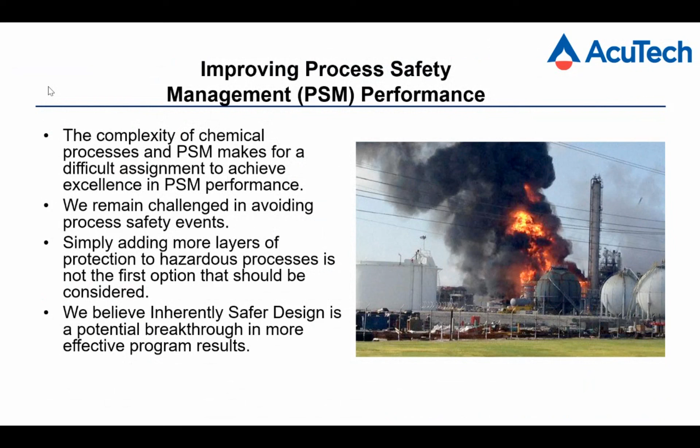I think that inherent safety is a 50-year-old breakthrough that is just waiting to happen. I hope that this discussion inspires you to look into inherently safer design more thoroughly and to see the potential that it has to help all of us.

ISD is something that you probably have experienced or know something about. It's a topic that's been around since the 60s, originally developed and coined by ICI in the UK in the late 60s. Trevor Kletz, one of the most prolific writers there was in the process safety field, was highly known for this topic. He had a famous saying, 'What you don't have can't leak.'

That philosophy was something that he discovered from years of watching all there is to do about process safety. He basically concluded that one of the most important items is inherent safety. And it's very pragmatic.

In essence, let's take it from the top. Examples of inherent safety would include finding a way to substitute a chemical that's more benign for one that is highly toxic or flammable when you're in the development stage of a new process, in order to affect a dramatic change in the hazards of the expected operation.

Or maybe the transportation of chemicals. You find a way to limit chemicals you transport, or to limit quantities, or to avoid transportation altogether through hazardous populated areas. Or maybe it's involving the process facilities themselves in the manufacturing. There are techniques that you might use to reduce the reactivity, reduce the hazards being present, or even in commissioning.

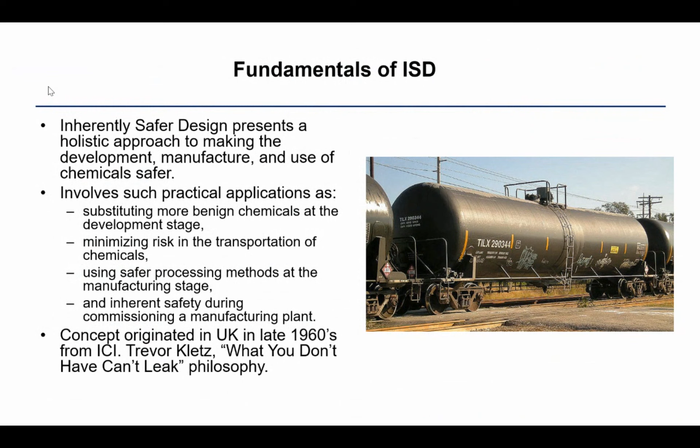In a nutshell, there's plenty of examples throughout history of the industry of us making smart decisions that you could call inherent safety. What I'm talking about is organizing that into a concentrated effort and getting the maximum value out of it. Now, a lot of what we're going to talk about comes from the fact that we just completed the 3rd edition for CCPS.

This is now published and available from CCPS, and it's an improvement over the 2nd edition, which we also wrote. This is the source of much of the content in this webinar, which you're welcome to look at, or to contact me if you had questions going forward.

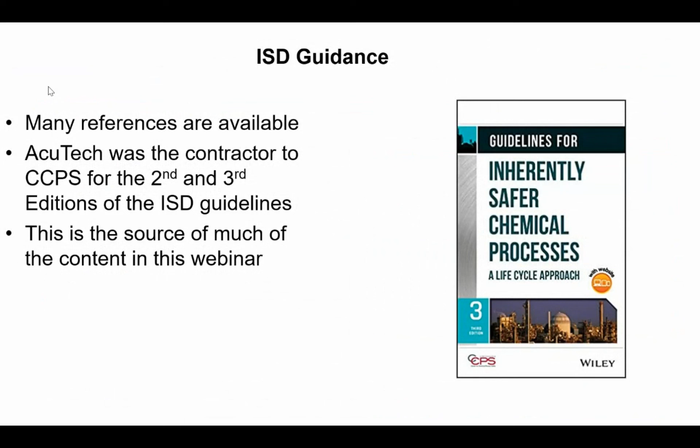The typical approach to process safety is to do the usual things that you all do every day. Identify hazards. The awareness of those hazards means that you then determine the necessity of various layers of protection, and you're focusing on reducing both the likelihood of those hazards being realized as well as the reduction of the consequences should they occur. And this is good practice.

But the ISD approach says, let's not forget that maybe you can affect the hazard itself, and that's what you should focus on. So yes, you have to identify those same hazards, but then once doing that, rather than immediately thinking about how I can apply layers of protection to reduce those hazards by simply reducing the likelihood or the consequences, let's try to eliminate or reduce the hazards themselves. And that sounds trivial.

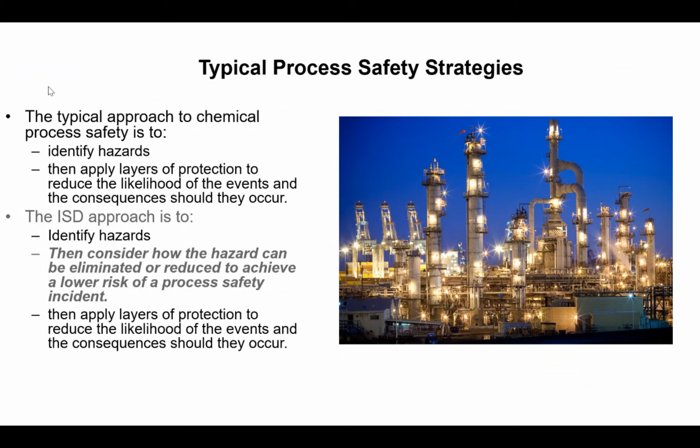It isn't always. And I think sometimes people think it's impossible because, after all, I'm in the business to make this chemical. And so they discount this as being very effective, and they focus on layers of protection and the hierarchy of controls other than inherent safety.

That sounds almost too good to be true, but I can tell you that we have become attuned to this, and we always ask these inherent safety questions first. Often we find ways that whole sections of equipment may be modified, chemicals may be eliminated, other choices may be made, and it's very, very helpful to reducing that risk.

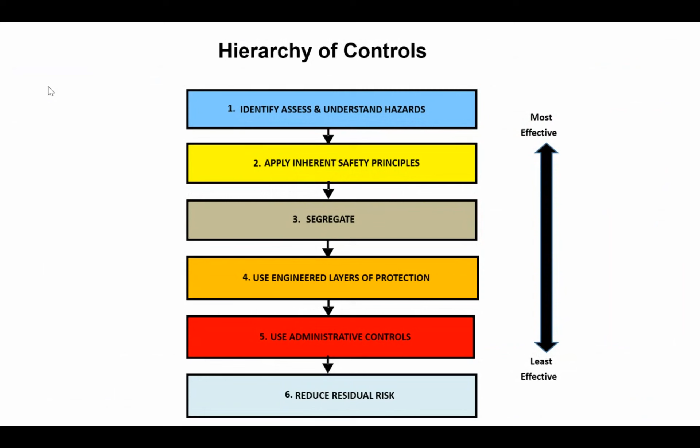So it's a fundamentally different way of thinking about the design and the operation of chemical plants and processes as you're both engineering them and operating them. And if you think always about how can I eliminate hazards rather than try to add on or bolt on safeguards and equipment, you're on the right track.

And honestly, you have to get into that mindset. I notice that all too often when we're presented a process for a HAZOP, the first thing we think about is what is the hazard? And the second thing we think about is how can I add some rugged safety control, such as a detection system or a pressure safety valve or what have you, to be, quote, in compliance and to manage these events should they occur. This is a different line of thinking.

And I think if you can achieve this, you're going to end up with a simpler, more robust process that has the absolute hazards, if you will, wrung out of it to the extent possible, and you're left with a residual risk that could be far less and far more manageable.

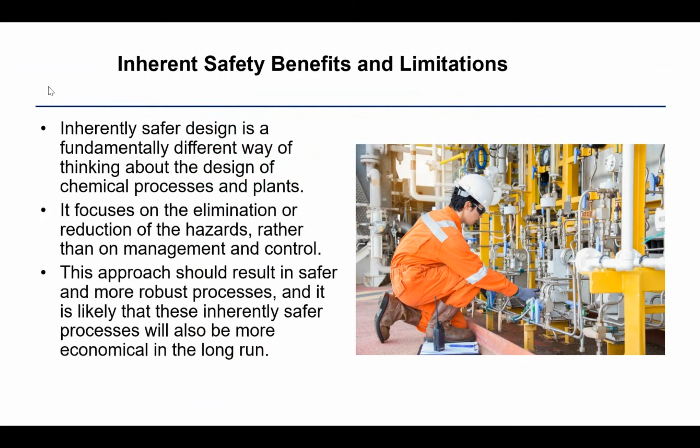Now, the way you go about this is through the application of 4 simple strategies. If you read some of Trevor Kletz's publications, he mentions about 8 or 10 of them. And what happened in version 2 of the CCPS guidelines is we recommended consolidating this down to a simpler set of strategies. The reason for that was to try to keep it simple so that people would understand it and it wouldn't be too confusing.

So minimization is the idea that best case scenario, if I could get rid of a chemical that I don't need, maybe an ancillary chemical like a solvent that's flammable, and I can perhaps substitute. If I can't get rid of it, I have to substitute it. And I put in place either no chemical or one that's a whole lot less flammable, let's say. I've made a contribution, perhaps.

And of course, the question becomes, well, what have you sacrificed? And that's to be seen. But I put my safety hat on first and challenge the design and don't take for granted the original proposal necessarily until I ask. Because often it's like anything in life, if you don't ask, you don't get.

And there's also moderation, which is admitting that, well, we can't really eliminate the chemicals. Maybe we can't change the size of the vessels or what have you, but perhaps in the way in which we operate it. We're not operating in the same range. We're not operating in such a sequence or at such a temperature or pressure. And these are opportunities to keep us out of a more hazardous range.

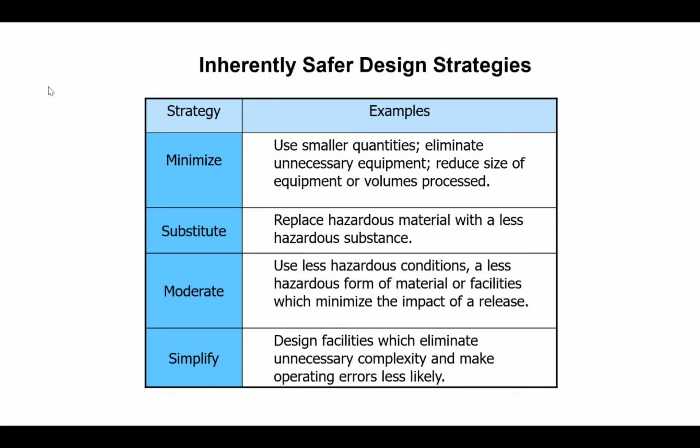So there's various ways to look at simplicity, but it's all good when it comes to safety, that if I can reduce the complexity, it's easier to train. It's less likely to make a mistake. There's less congestion that may amplify an explosion. There's less leak points and so forth. So I think this is the principle, and you probably know what I just said here, but let's talk about a few other details, like there are viewpoints.

We brought this point into the latest guidelines. The idea was that everybody talks about inherent safety as though it's go, no-go with a certain process chemical—like we don't like chlorine, or we don't like ethylene oxide, or one thing or another, and we think you ought to either substitute it or no longer be in business. This is very threatening, and people get hung up on the idea that there's only this macro view, which is you have to use an alternate technology.

You must substitute the entire process. What I found is often that's not feasible, and it creates a fighting line where people draw a line in the sand and say, I'm not going to do it. We're in business for this, and there's no progress.

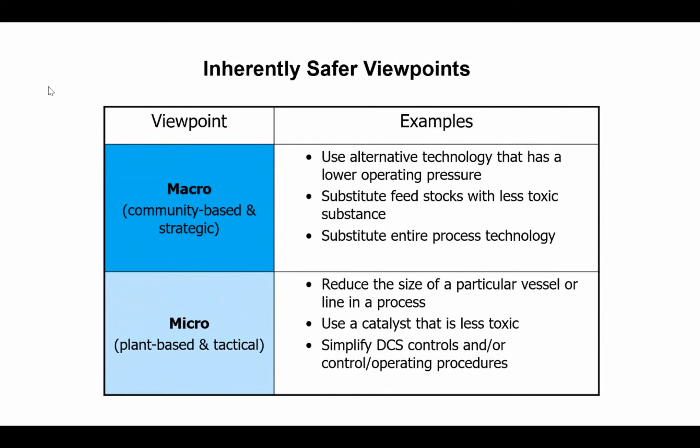Whereas with the micro view, you can make progress one cut at a time. Can we take a particular vessel in this process and make it redundant? It's not really required. Can we use a different catalyst? Can we simplify DCS controls? The majority of contributions we make when it comes to inherent safety are micro, but the sum of dozens of micro changes equals a very good change. I often say any move in an inherently safer direction is a good move.

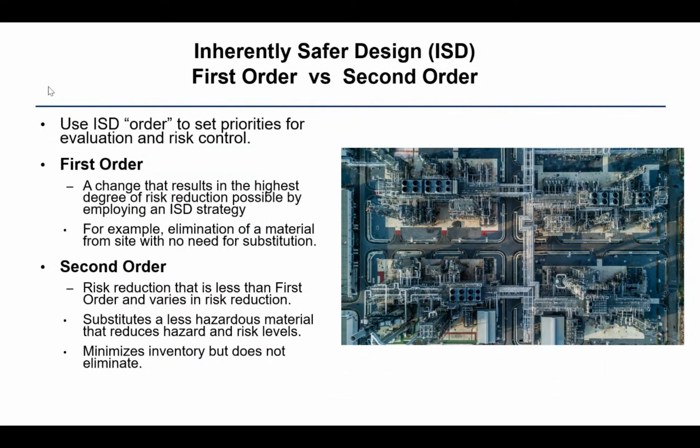Now, the other idea is the order of inherent safety design recommendations. I mention this because I like to encourage people to make the highest order change—this is the range of impacts you may have with your recommendations. Of course, let's aim high. Let's try to eliminate the chemical. Let's try to make the biggest change we can. So while I'm accepting of minor as opposed to major changes, I'm not aiming low—I'm aiming high.

Now, what I've noticed is everything I just said is fine—a lot of people have tried it. They've tested the water, put their toes in, but haven't really consistently done it. One of the reasons, I think, is that they're not encouraging it enough, perhaps.

For example, how many companies actually have a written policy that says we do IST studies, and they must be done before a project goes into FEED engineering, and at various stages if we make any changes? How many companies have a written procedure on how to actually conduct an IST study? How many companies actually do IST studies, either as special studies or as part of their PHAs? And have we given our people training so they know how to conduct this?

So I thought it might be interesting if you use your poll buttons—if your company has either A, B, C, and/or D, please select all that apply. A, you have a policy. B, you have a procedure. C, you document this kind of consideration in studies very consistently—it's part of your corporate culture. And D, you've given training.

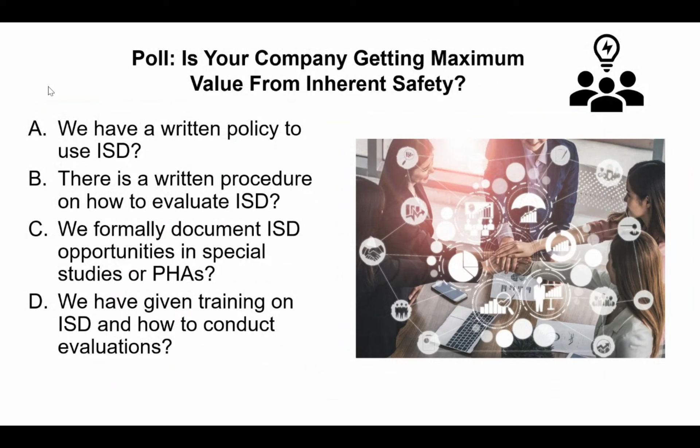We'll talk about that in a moment, but what we think is if you adopt A, B, C, and D more formally, and really encourage it and have discipline about it, you'd be surprised how much change may come about. Now, I'm a believer in the premise that ISD can and should be widely and routinely used, not just as a one-time study.

We get in this rut, really, where almost out of necessity we can't do PHAs every day—we have to do them periodically. That's fine also with ISD studies, but we shouldn't get in the mindset that one ISD study way back when we were first thinking about this new process is all we need to do, and then forget it. Because things change, and we've learned that lesson for PHAs. So why not apply the same logic to inherent safety?

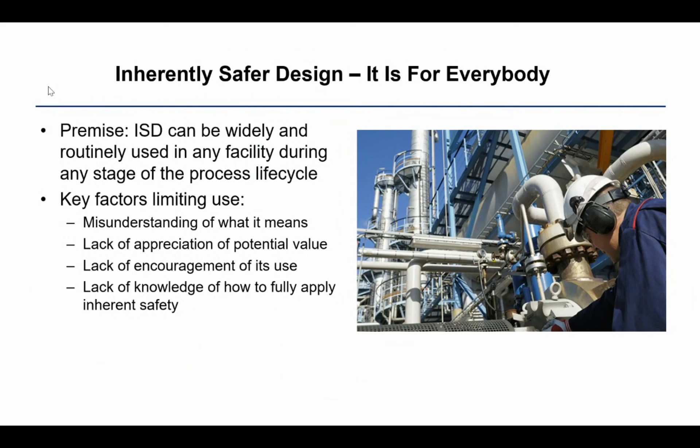So I'd argue there are a lot of factors limiting the use of ISD: some confusion on exactly what it means, maybe a lack of appreciation of how much you can get out of it, and not everybody has a strict policy or procedure, nor good written procedures about how to execute a study.

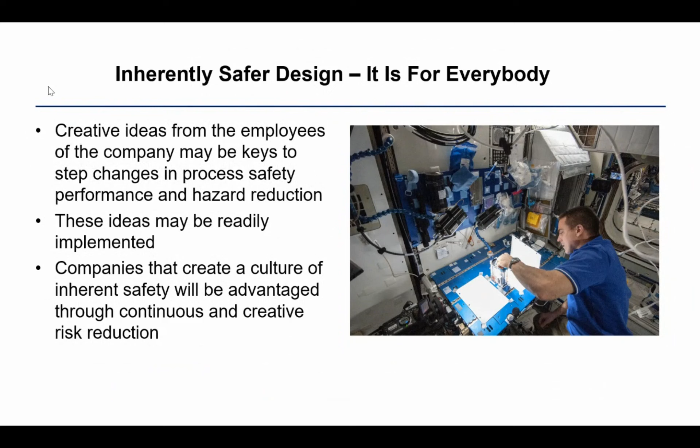Another thing I'd like to bring up is that if you take inherent safety as a safety philosophy, that's even better. Every employee every day is presented with some decision involving safety in our business, not just the PHA teams or an occasional ISD study. I believe providing this kind of high-level training to everybody, whether it's an MOC, a PHA, a PSSR, an engineering project, or a research project, means they'll be thinking my company wants me to emphasize inherent safety first. They'll be advantaged, turning out lots of good work without being forced into a study. Companies we've worked with that get what I'm saying are quite excited, and you see them making conscious decisions and documenting things beyond just a special PHA study.

Everyone believes that's the place for ISD. But I don't see that as the only good place to do this—in the operations and even maintenance phase, most of our industry is already constructed and operating, and that's actually where we've made a big impact. I would absolutely tell you that inherent safety studies of existing facilities are also extremely useful.

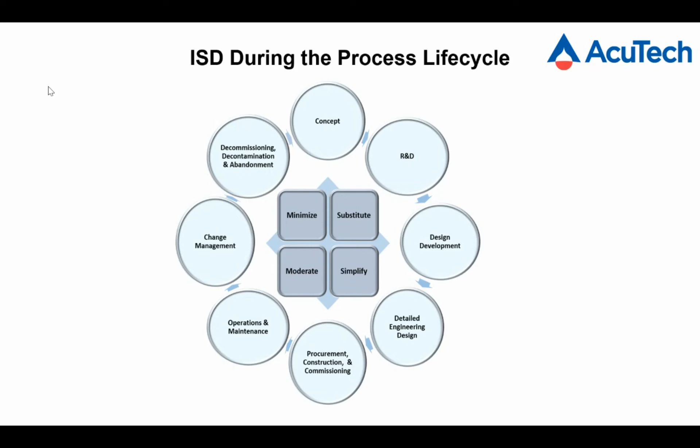There are a couple of different ways to do a practical study. I say practical because if you follow the industry, there are lots of papers about indices, and those are useful, particularly for people using something well recognized like the Dow Fire and Explosion Index. They'll do a study, analyze that index value, look at alternatives, and determine which one is inherently safer by relative risk.

I'm really more interested in specific risk studies, because to me there's nothing cookie cutter about this. You have to look at a process, get creative, think about the opportunities, and make a difference through smart engineering. So there are two ways: independent studies, meaning a study done only to concentrate on ISD opportunities—not that I don't care about other things, but that's usually the purview of the PHA.

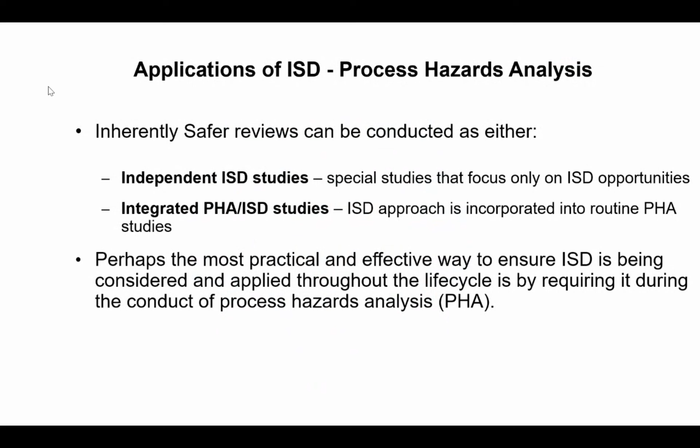The second way is to integrate your PHA studies by incorporating ISD concepts. I could probably survey actual studies and find almost no mention whatsoever of ISD concepts—almost everyone identifies a hazard and makes certain we have proper shutdown, isolation, fire protection, etc. So forcing it into the PHAs makes a smarter PHA study. That's the advantage, and that's why incorporating it is the most practical and effective way in the long run, unless you have a need for a special ISD study.

So the steps are kind of like a PHA to begin with. This involves having a team and the right people, and conducting an assessment of the nodes once you understand the process. They don't have to be the same—if you had 50 nodes for a complex process PHA, maybe you only need to consolidate down to 10 nodes that you're studying for the ISD.

At each node, you're iterating through asking about those 4 strategies. You might say, well, we can do that one time with a checklist—no, that's too high level, too general. You get a lot more out of this when you narrow it down to a consolidated number of nodes. The typical PHA hardly talks about this at all, and focuses instead on other layers of protection. So one thing we recommend is to try interjecting this into a PHA, and you'll be surprised at the number of things you weren't thinking about in that mindset.

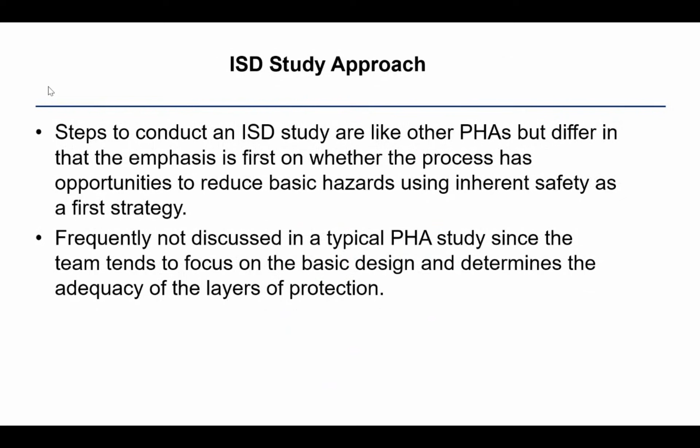Then what you do is understand the hazards. You could use common knowledge of hazards, or you could use previous studies like a HAZOP or a HAZID.

The idea is you're taking one of those hazards and you're challenging it directly by saying, how can I tear that apart, eliminate it, reduce it? We don't often do that. We often talk about how can we put a barrier between us, and lots of barriers. Barriers are good, but barriers can be weak. So what's better is to eliminate that if you can. And it isn't fantasy to eliminate or minimize hazards. It can happen.

So then you analyze what we call opportunities. We call them opportunities because there's usually more than one opportunity of how you might treat a hazard, and you're not sure at this point as to whether those are actually viable, what we call feasible.

And you do all 4 of the ISD strategies, and you concentrate on the first order. Remember, our first order meant try to go for swing for the fence first. And if that doesn't work, then you could back down to a lesser improvement. I'd rather have a 10% reduction in hazard than ignore it altogether.

And then you determine the feasibility. Feasibility is often complicated. I've been in studies, ISD studies, where the feasibility was obvious. Do we need that? No, it's actually abandoned. We should make a decision to isolate that and dismantle that and get that equipment out of here because it's unnecessary. Whereas other times, can we substitute a catalyst? That is something you don't want to just say, sure, it's feasible and possible and let's go for it, because there's potentially lots to think about.

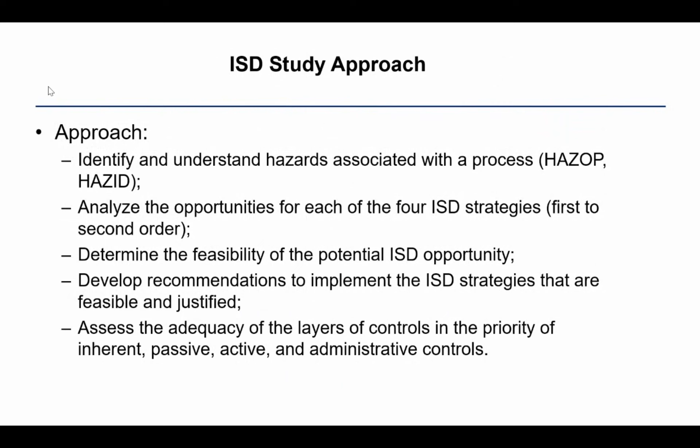Now, one quick way to do that, as I said before, is to use a checklist. A lot of people like checklists, and we use them too. They're rigorous because they are consistent and complete. And let's say that they come from a book, they got to be right, and they have a lot of information that maybe your team hasn't thought of because you haven't experienced it. So you take a good reference, like the CCPS guidelines has a checklist, and there's 100 plus 200 questions there.

And you use this every time on every process and fill in the opportunities, the feasibility, the recommendation, and so forth, you're doing an inherently safer design study. And maybe it's standardized because you're always using the same checklist. So those are the advantages.

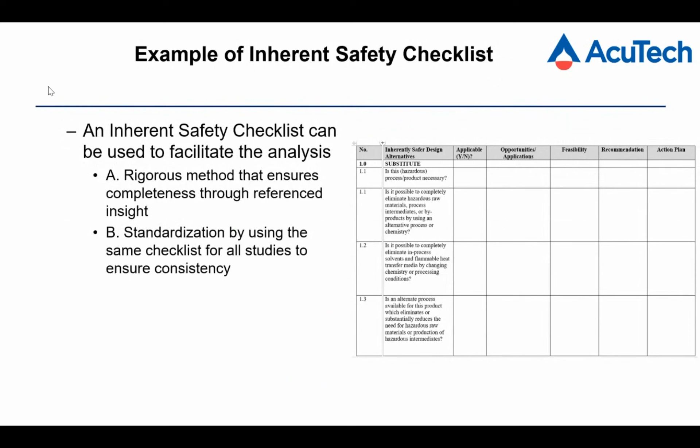But I'd like to ask you this. Are there any disadvantages of just using a checklist and nothing else? So what are the disadvantages of only using a generic checklist? Is it A, that a generic checklist may miss specific process opportunities that aren't mentioned on that checklist? Is it B, that by the monotony of using the same checklist alone, you're not being as creative? Is it C, that checklists can simply be incomplete or dated and the version you have isn't maybe the best, and we're all limited to what was on the checklist, so we miss a hazard for that reason? Or is the answer all the above?

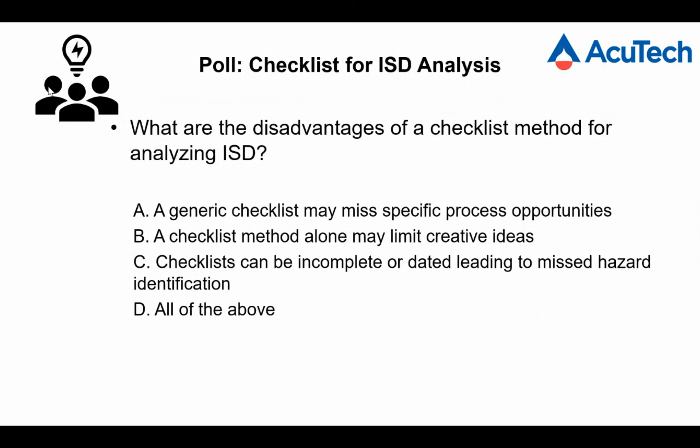For one thing, if I'm a chemist being charged with helping to put together concepts for a new process at our plant, and the end result is we want acrylonitrile to be produced, I might look at the conventional process, which uses hydrogen cyanide, and get on with it. And then we take a typical design package from a vendor that licenses this, and we start building it.

And then what do we focus on? We focus on making sure it has sufficient safety instrumented systems, detectors, fire protection, etc.

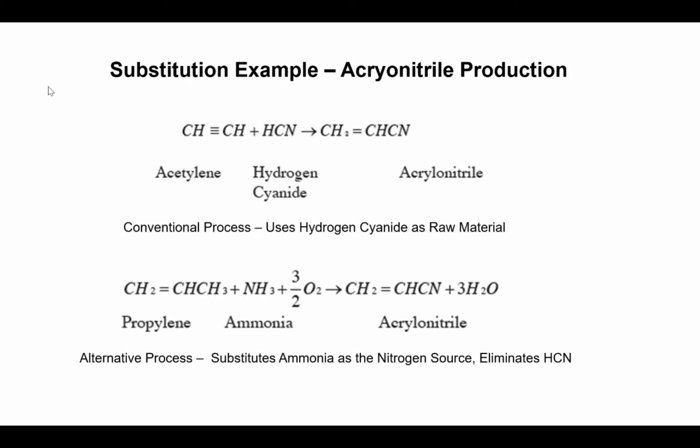You might say to those people, when you're looking at this, we want you to formally study inherent safety. What are the options? I'm not a proponent of this particular option necessarily, and certainly not in every case, but I'm just pointing out that there are options on how to make acrylonitrile. Very often these things are ignored because of tradition or because of cost, and they should be looked at, particularly if you have a difficult, populated proximity of population or what have you.

It's the lesser of two evils, I guess you'd say.

And here's another example. Maybe you want to make methyl acetate, and the conventional process involves about 10 different major process vessels. That may be incredibly efficient, well understood, stable, et cetera. There may be another one though, involving a lot less equipment - this is a reactive distillation process, which theoretically only involves 3 major vessels.

Now, for me to say that that is better than the first one is a misnomer, because I have not studied it and have not evaluated the specifics. What I'm condoning is the idea of encouraging engineering teams to look at alternatives where they can eliminate vessels, eliminate points of release, simplify a process, etc.

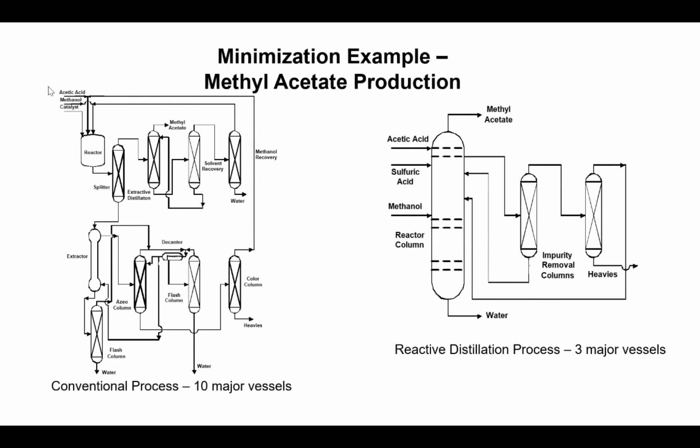Don't just let them always give you as complex a process, and then you have to deal with it in terms of managing the risk. So those are things that are done in the early stages, but I'll tell you what most studies are.

Most studies involve an existing plant or a design that's somewhere in FEED or in engineering phase, and by then they're pretty well committed. So now what can we do?

Most people at this point would say, well, ISD is over with. There's nothing to do.

Think of it like a PHA study, and let's attack it one step at a time. Get prepared, see if there are alternatives, see if there's anything that can be done at this stage, understand the process, then go through in a node way, like we just described, all the ISD strategies, and identify all of the possibilities, what we call opportunities.

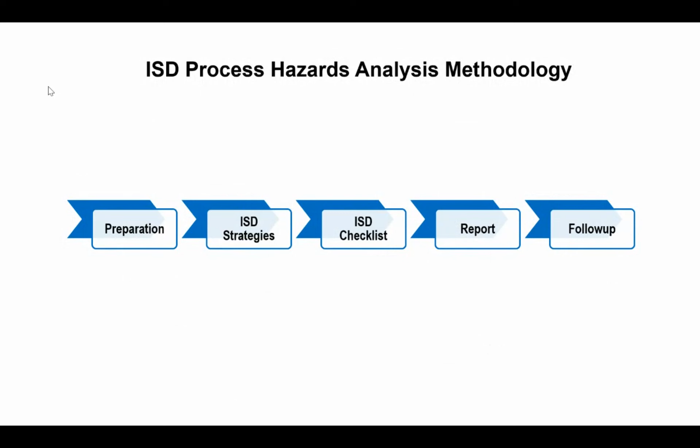And then what we do next is interesting. While I was criticizing ISD checklists as the only method, we think it's useful after you've had that creative prior step of asking the team to identify hazards and directly identify what we can do about it using the strategies. Let's then go to the ISD checklist, because some of those checklists have brilliant experience-based ideas that you don't want to forget about. Then you prepare a report that formalizes all this and follow up to make sure it's getting done. So it looks a lot like a PHA.

Very often this is entertained at a gross level of the entire process, and I could tell you the majority of the answer to that kind of a question is no way. So what you would be better off is looking at it on a smaller scale. That's why nodes are valuable, because on the feed line, well yeah, we're bringing feed from halfway across the plant and there's a closer tank that supplies it. Why are we doing that? So there are things that you can do if you look at it more carefully.

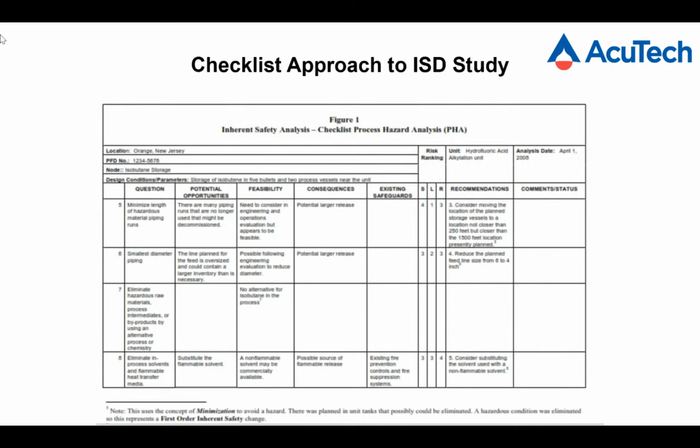This is not a bad thing, but I'm saying that if all you do is read off the 50, 100, 200 questions and fill them out, a lot of times those questions are not relevant, not applicable, or too general. Now, this is what we prefer to do.

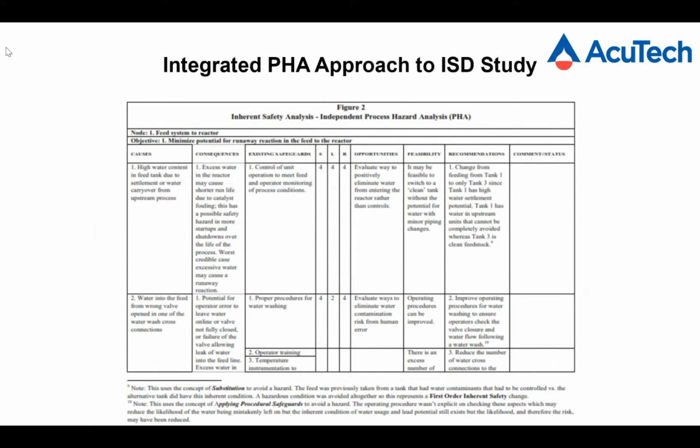And if you can eliminate the, let's say, water problem altogether, well, then so be it. You may have then eliminated quite a bit of additional safeguards, and certainly the potential for the failure of those safeguards. Now, ISD is pretty good. I appreciate it a lot. There are pitfalls. We need to talk about that.

And if you know who John Muir was, when he wrote his books on conservation, he was a real environmentalist back at the turn of the last century. He basically said it when he was referring to the impact we may have on the environment by making some change to the environment. He said, we try to pick out anything by itself and we find it's hitched to everything else in the universe. What that means, simply put, is any change that we make could potentially affect everything else.

So that's the biggest warning I can give you: I don't care if you're really sure that this is inherently safer, you've got to be extremely careful that by throwing out this suggested change, whatever it may be, you may have caused a domino effect and complex interactions which cause additional hazards.

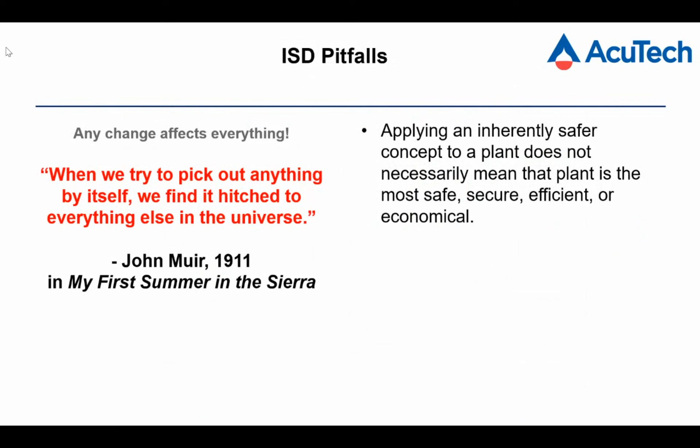And let's not forget that you don't build a plant only for safety. You build it for production, efficiency, reliability, security, economics. So you're competing with people, and you have to be careful not to force one solution that causes another one.

Now, a big part of that is the transference of risk on a macro scale. Like, for example, let's say you say, I don't want to have a lot of on-site inventory because from a public risk standpoint, that's just more opportunities for large releases from my plant that could go into the community that I have to manage, and there's a high risk of that. So yes, I like minimizing tank inventories, et cetera, but if you take it to an extreme, then perhaps you've transferred all the risk to the transportation sector, unless you've eliminated the process.

You've got to bring a lot of product in and export a lot of product out because you're not storing it. So there's a balance between efficiency and economics and reliability and all the reasons why we like large tanks and things, and inherent safety. And you need to evaluate that carefully.

There's even a favorite one that a lot of people brought up with ISD. ISD, of course, has been controversial for safety and security. I testified in a Senate committee on whether it should be regulated. People who are not in the industry look at this and say, of course you shouldn't have such a large quantity of chemical that's that hazardous anywhere near this community, and so forth and so on. And so they're very distrustful.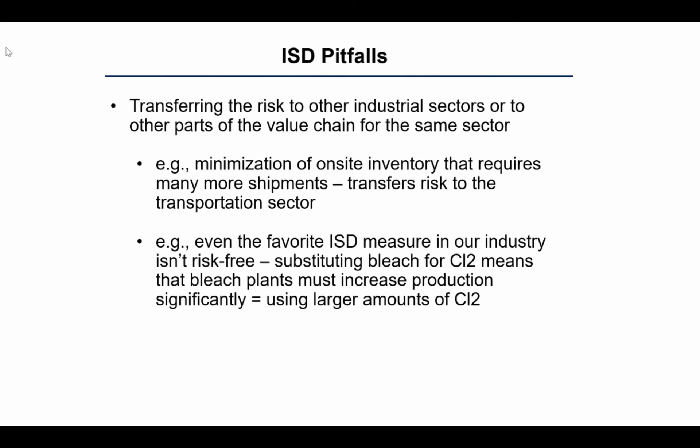This might be simple, but somewhere there's probably a bleach manufacturer that now uses sodium hypochlorite bleach but isn't necessarily manufacturing to the same level of exposure as before. So it's like squeezing a balloon, right? You get some potential to expand the hazard where you didn't intend.

I'd also want to mention that the most effective ISD applications I've seen, and there are companies that have achieved this, is where they institutionalize ISD to where it's a matter of company culture.

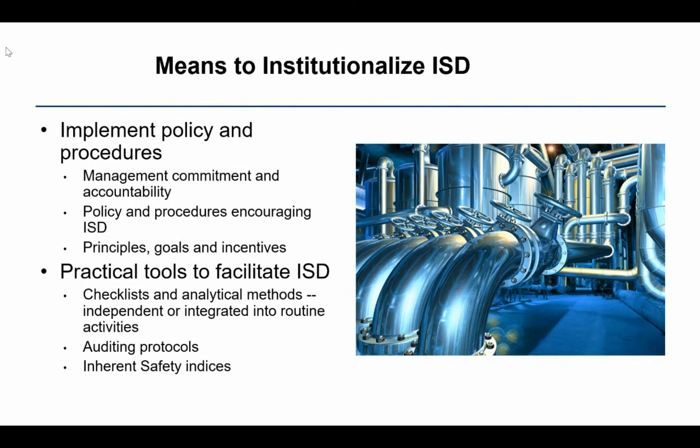How have they done that? We gave you a preview on that one poll, but they implemented policy and procedure. They had management behind it. Everyone's accountable, it's in everyone's objectives, it's evaluated. There's policy, goals, and incentives even. They've developed tools, checklists, auditing protocols, and even their own indices in some cases to show this is really important stuff. It's not a one-off, one-time thing where we play around with it a little and use a checklist with a few questions. This is an integral part of their strategy for process safety.

Now I wanted to close by mentioning one company we worked with, an international chemical manufacturer, and this was a recent one. They had 5 manufacturing sites around the world that were concentrated large chemical complexes. We went to each of these, starting at their headquarters, and they were curious about ISD. It was almost like, we hear a lot about it, we want to see it in action, we'd like to judge for ourselves whether we should really be entertaining this in a big way.

So we did 5 studies, each taking about 4 days of session time. If that was a HAZOP, each study would have been more like 20 to 30 days or more, because focusing just on ISD as a special study was simpler. And was it productive? Well, yes. The company was pretty impressed because they had HAZOP'd all of this, but we ended up with 193 recommendations for these 5 processes, and they're at this point implementing some form or fashion of every one of them. That's about 38 recommendations per study in 4 days.

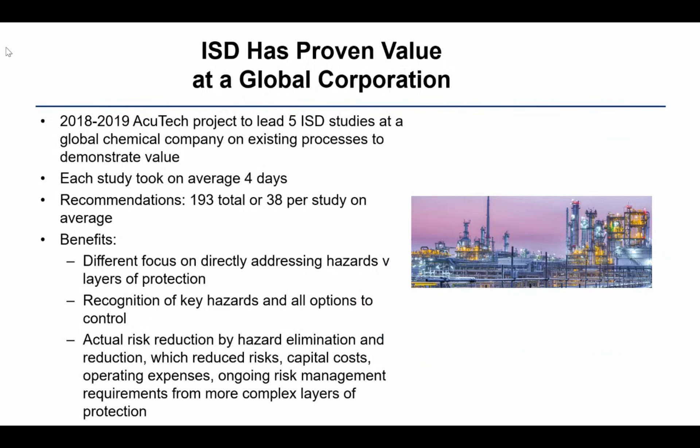They had us do some training, ultimately over 200 people. Curiously, the CEO heard about this, so he came and brought some of his VPs, liked it so much that he mentioned at the end of the training that we really have to do this. Competitively, we have to do this, we can't afford an accident. He said nothing will stop our company's ability to succeed financially or technically, except a process safety catastrophic accident, and I want this to be done. It was very inspiring.

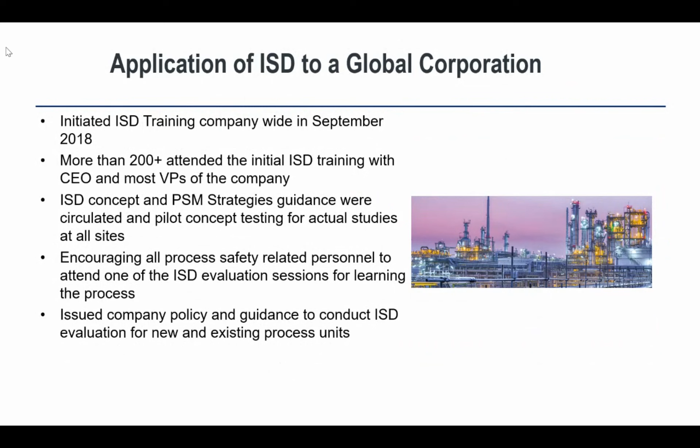All of the process safety related personnel attended one, and then we expanded that out to engineers and so forth. We helped them develop a company policy and some guidance documents on how to do this, so then they had a standard procedure. In the end, we took all those recommendations and made sure they were getting action on them by helping them prioritize.

Priority one isn't just the cheap things, it's the things they felt could be easily implemented and considered a high priority, things they felt very comfortable recommending and wanted to address right away. They were kind of excited about these possibilities. Priority two were some things that definitely needed more screening, maybe not as high a priority to them.

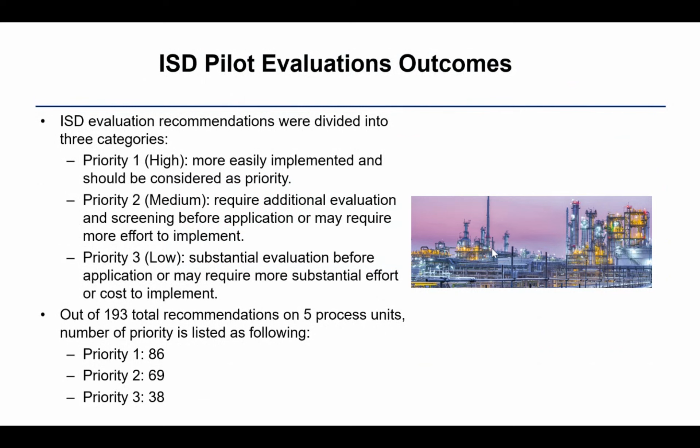They weren't going to make as big of a safety impact, but they sounded important. And three were things that had a lot more effort, a lot more cost, no less interest in them, but they just needed further study. So recognizing that inherent safety studies on existing facilities are not necessarily easy, what was interesting is that priority one was given the most. In other words, they were anxious to address and change the majority of these.

So now what they've done is they've adopted this, and in conclusion, this slide is really the words from them. They said that they are now going to implement it in all phases of the projects that they have, from the early stage development all the way through to operating. They're not only going to do the layer of protection concept, what they mean is typical PHAs and LOPAs, they're going to do the ISD concept as well.

They've seen now that they can eliminate needless equipment, basic process control systems, safety instrumented systems, pressure relieving equipment, etc., just by changing designs that they had intended, eliminating hazards and so forth. They feel that's going to make a huge difference in terms of the operational and maintenance, human errors, and costs of these things.

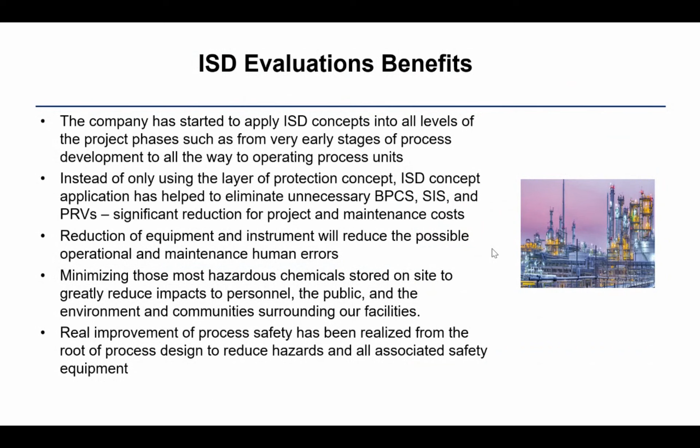We also got them to focus on some of the high hazard chemicals that they were storing in excessive quantities, and the public, community, and environmental exposure we think was greatly reduced.

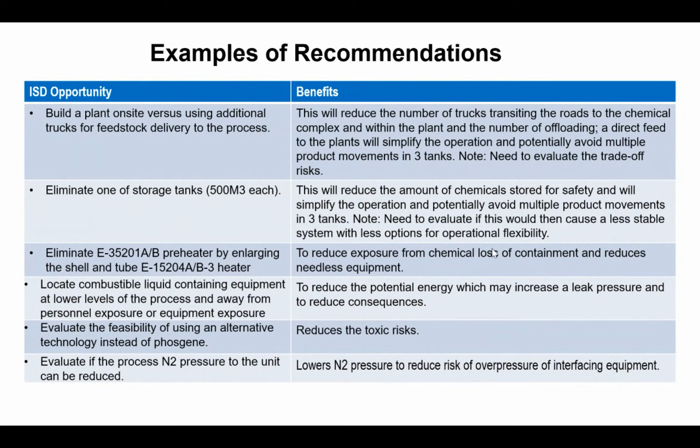There's lots of examples you can see later on, but things like, we weren't shy to say you've got excessive transportation of hazardous material going all through the plant. And now you're talking about expanding the plant where you're going to double that. Maybe it's time to look at an on-site plant that sounds more hazardous but actually has a direct connection and is a lot less hazardous. Eliminating storage tanks, eliminating equipment, changing technology, getting rid of toxic substances, and so on. And these were all existing plants.

So I'll finish by summarizing that ISD, as it shows, can clearly be used throughout the entire process life cycle, and especially for existing processes. I hope you all try that. These four strategies, as simple as they seem, have very wide applicability. Many, many interesting things are caught in the net of those four strategies. It represents a substantial opportunity for risk reduction, and the shame of it is it's not commonly used to its fullest extent, so whatever we can do to expand the usage of it, I think you'll be happy.

Be careful though, because even what seems like an obvious and simple ISD application may cause unknown hazards. You have to not be too anxious about implementing the first thing you can think of. Lastly, the more that you can ingrain this into the safety culture and have strong commitment, and not just consider it a one-time study that's no longer useful, we're way past that, the better off you'll be. So I hope that this has been interesting. Thank you for your time, and I'm happy to answer some questions, Sam.

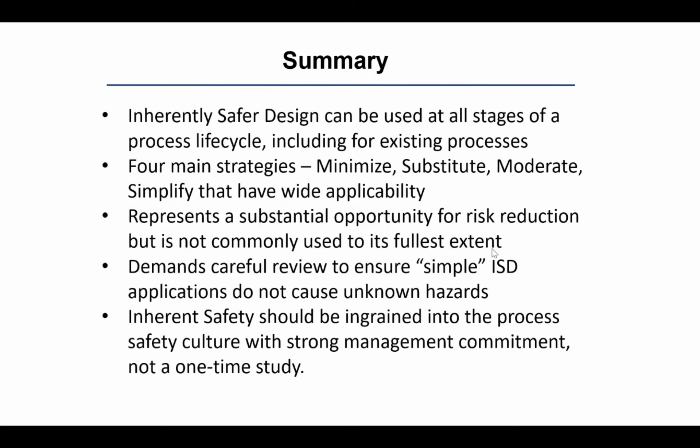All right, great. Thank you so much, Dave. It really is an interesting topic. It's just not as prevalent as it should be, but it's really very applicable to our industry, and it should be more widespread than it is.